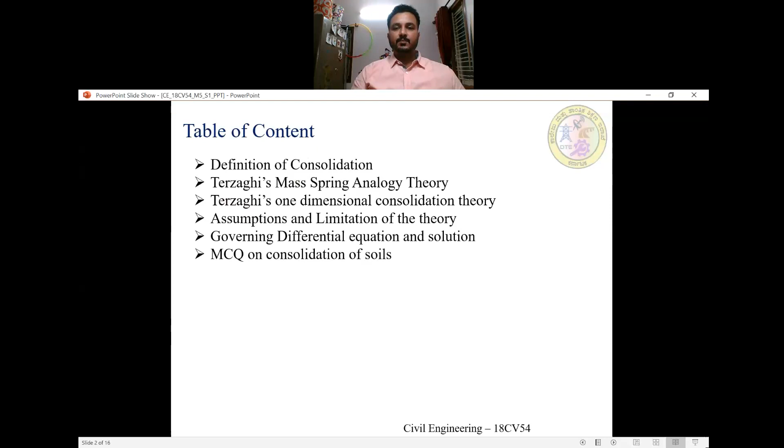Today's session we will be discussing the definition of consolidation, Terzaghi's mass spring analogy, Terzaghi's one-dimensional theory. We will also be discussing the assumptions and limitations of the theory, the basic governing differential equations, and the solutions of the one-dimensional theory. Finally, we will be discussing some important multiple choice questions relating to today's topic.

Coming to definition of consolidation. As you know, the soil is composed of many particles, solid particles, and it also consists of void spaces. These void spaces are generally filled with either air or water. Here, compressibility of soil occurs mainly due to the expulsion of the pore water from the voids. This process is called consolidation. It is a time dependent phenomenon.

Unlike compaction, which is a sudden process, consolidation occurs over a period of time and volume reduction happens due to the expulsion of water from the soil. Here, particularly, we are discussing saturated soil. Volume reduction mainly occurs on account of the load acting on the soil. The load may be due to the structure or any other temporary or permanent structure which is present over the soil.

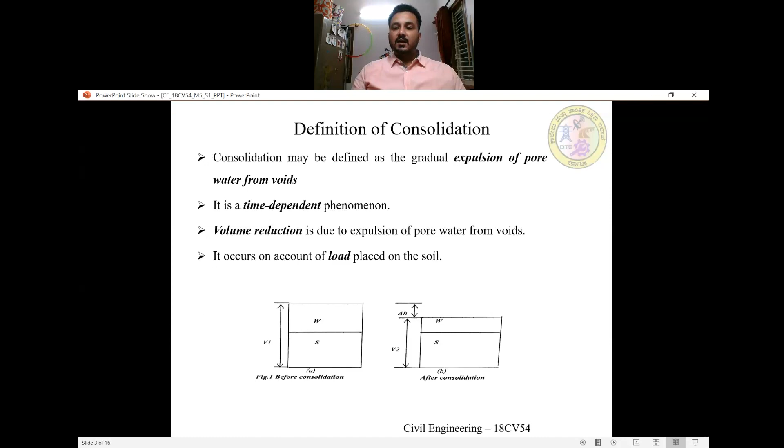Over a period of time, compressibility of soil takes place, thereby a change in volume occurs. The change in volume is represented by delta H, and the final volume turns out to be V2. This occurs due to the load acting on the soil, and this clearly represents how the consolidation process takes place. Moving further, we will be discussing Terzaghi's spring analogy theory.

In spring analogy theory, Terzaghi considered a container which is completely filled with water, and there is a valve provided which is initially closed, and in this container there is a spring provided, and the container is completely filled with water.

As you can see, when a load is applied onto the top of the piston, while the hole is still unopened, at this stage only the water resists the applied load. What I mean to say is there is a development of what is called excess pore water pressure. The load acting on the container from the piston is completely taken by the water.

As soon as the hole is opened, gradually water starts to drain out through the hole, and the load gets transferred to the spring. This can be explained as a process of drainage of this excess pore water. After some time, there will be no drainage of water, and the load will be completely taken over by the spring alone. This is on account of the full dissipation of excess pore water pressure, which terminates the process of consolidation.

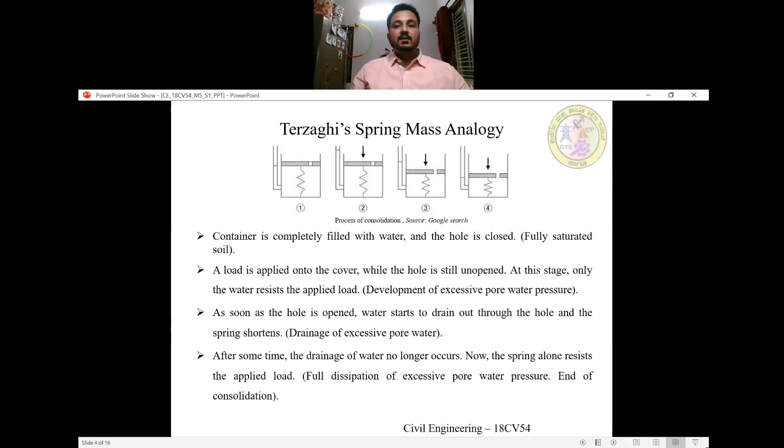So, how the load transfer takes place in the spring analogy theory can be explained with the help of this figure on the top, which shows a container with a piston over the top, and the piston is provided with a tube opening controlled by a valve. Initially, if you observe figure A, Pw plus Ps is equal to P, where P represents the load, Pw the load carried by the water, and Ps the load carried by the spring.

Initially the load will be taken by the water at time t equal to 0. Therefore, the load carried by the spring Ps will be equal to 0, and the load carried by the water will be equal to 1, since Pw plus Ps is equal to 1 if you consider 1 kilonewton of force acting upon the piston.

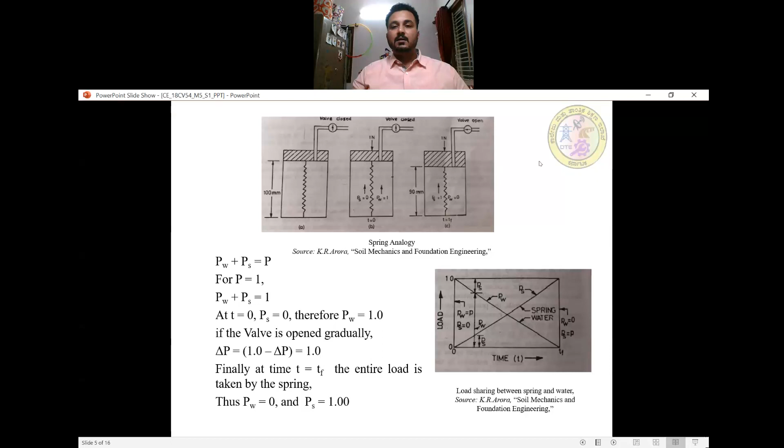Next, we'll be discussing Terzaghi's one-dimensional consolidation theory. This is a very important theory proposed by Terzaghi, and the assumptions of this theory are like this. Terzaghi assumed the soil to be homogeneous and fully saturated. He also assumed the soil particles and water are incompressible. That means they cannot be compressed.

Darcy's law for the velocity of flow through the soil is perfectly valid. Coefficient of permeability K is constant during the process. It means that the water flows freely, and the coefficient of permeability will be taken to be constant. Soil is laterally confined so that the compression is one dimensional. This is a very important assumption because Terzaghi assumes the compression to take place in one direction. It is not assumed to take place in two dimensions. It is a one-dimensional compression. That is one of the important assumptions.

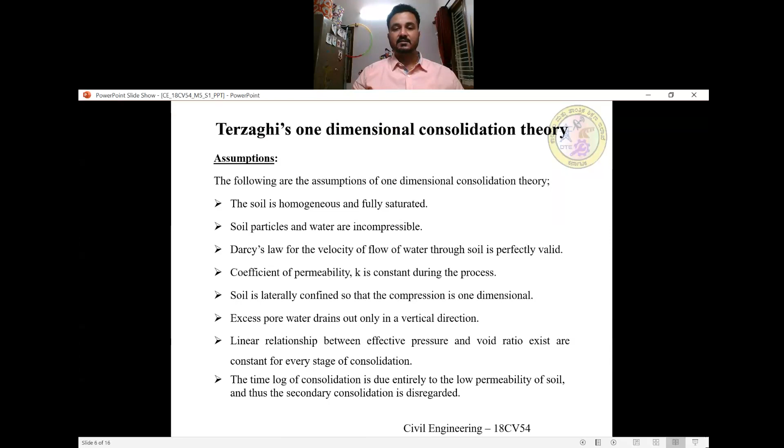Coming to this theory, if you observe the figure, there is a section of clay layer chosen, and the top and the bottom of this layer consist of sand particles. As explained in the spring analogy model, initially the whole of the pressure is taken up by the water, and the excess pore water pressure develops.

In this figure, you can clearly see the hydrostatic pressure diagram on the right hand side. It is assumed that various points along the thickness of the clay layer are connected by flexible tubes, and at time t equal to 0, just after the application of the load, the excess hydrostatic pressure is equal to delta sigma by gamma w throughout the clay layer. This is represented by the horizontal line. So the excess hydrostatic pressure is independent of the position of the water table. For example, the water table is assumed at the level of the surface of the clay layer.

So at the instant of loading, that is at time t equal to 0, the excess pore water pressure will increase uniformly by ui over the thickness h of the layer. Please observe the figure shown at the top. The layer is divided into two parts, h by 2 and h by 2, where h represents the thickness of the overall layer.

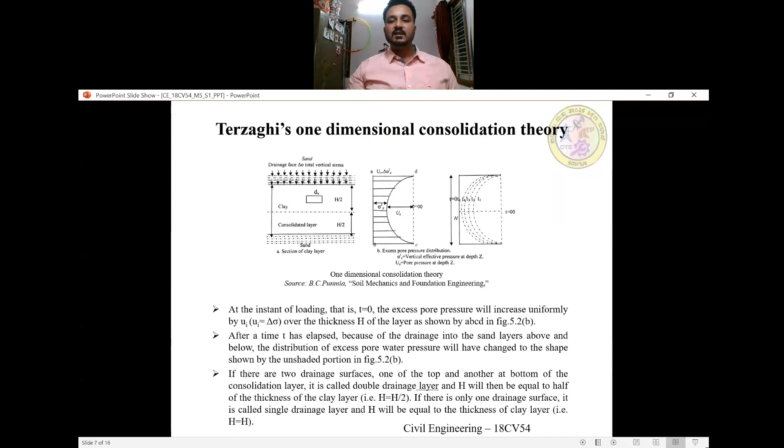Finally, when we solve this equation, we arrive at Terzaghi's one-dimensional consolidation equation, shown in the slide. This clearly explains the variation of pressure with respect to time and depth. This is the basic differential equation of one-dimensional consolidation. It gives the distribution of hydrostatic excess pressure, U bar, with respect to the depth z and the time t.

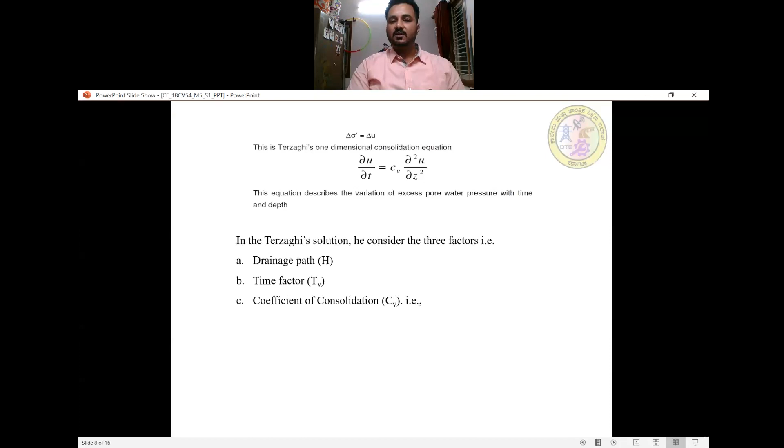In the Terzaghi solution, there are three important factors which he discusses. One is the drainage path, that is capital H. Another is the time factor, TV, and most importantly, he discusses the coefficient of consolidation, that is represented as CV.

Here, the time factor TV is given by the equation TV is equal to CV into t divided by capital H square, where TV represents the time factor. Small t is time in seconds. Capital H represents the thickness of the permeable layer. Okay, and CV, that is the coefficient of consolidation, can be obtained by the equation

CV is equal to K divided by MV into gamma W, where MV represents the coefficient of volume change and can be represented in centimeter square per gram or meter square per kilonewton. CV can also be written in the form CV is equal to K into 1 plus E divided by AV into gamma W.

This equation represents the coefficient of consolidation in terms of coefficient of permeability and void ratio. So here K represents the coefficient of permeability, E represents the void ratio, and AV represents the coefficient of compressibility.

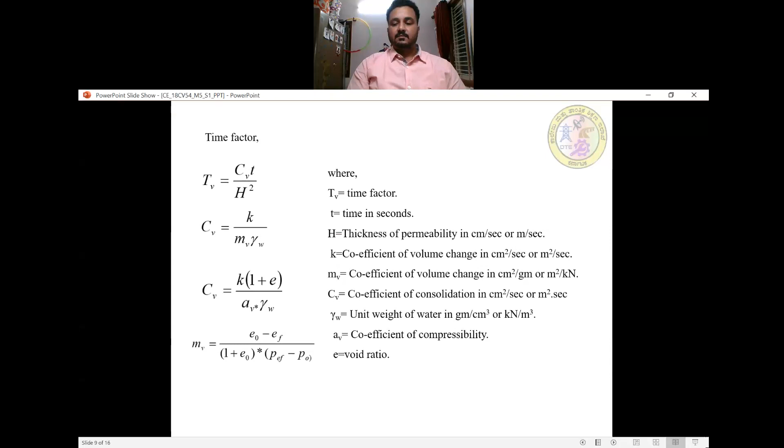Another important limitation in this theory is that the flow is assumed to be one-dimensional, but in reality, as I told you, the flow is three-dimensional. So this is one of the important limitations.

The application of external load is assumed to produce excess pore water pressure over the entire soil layer, but in some cases the excess pore water pressure does not develop over the clay stratum. This is particularly due to the application of the external load, how the load acts on the soil stratum. The load distribution will not be uniform.

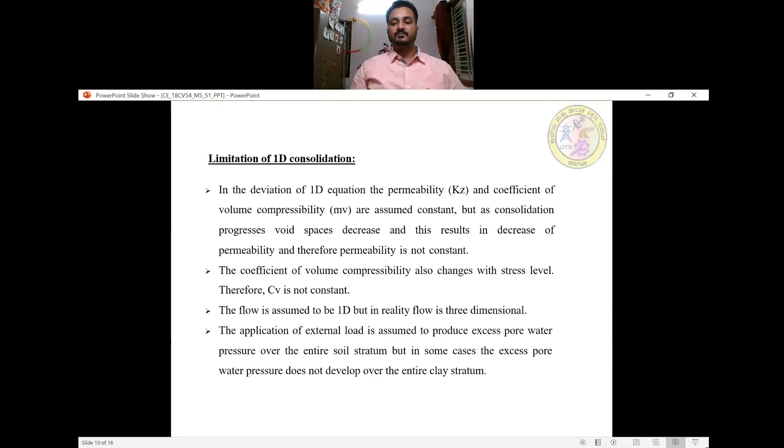So coming to the final part of the presentation, here I'm discussing some of the important multiple choice questions. The consolidation of soil involves: settlement of soil, gradual drainage and compression, compression of air in the pore spaces present in the voids, or none of the above. The answer is gradual drainage and compression of water through the voids.

Second important question, the rate of consolidation. Does it increase with a decrease in temperature, or does it increase with increase in temperature? Is it dependent of temperature, or is it unaffected by the permeability of the soil? The answer to this question is B. The rate of consolidation increases with increase in temperature.

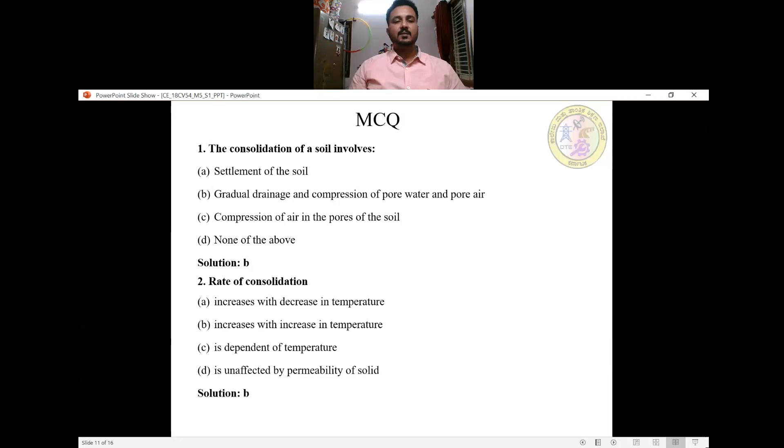The unit of the coefficient of consolidation: centimeter square per gram, centimeter square per second, gram per centimeter square per second, gram centimeter per second. The answer is centimeter square per second. The coefficient of volume compressibility in soil: is it proportional to the void ratio, decreases with increase in the void ratio, is inversely proportional to the void ratio, or is inversely proportional to the square of the void ratio? The answer is B. It decreases with increase in the void ratio.

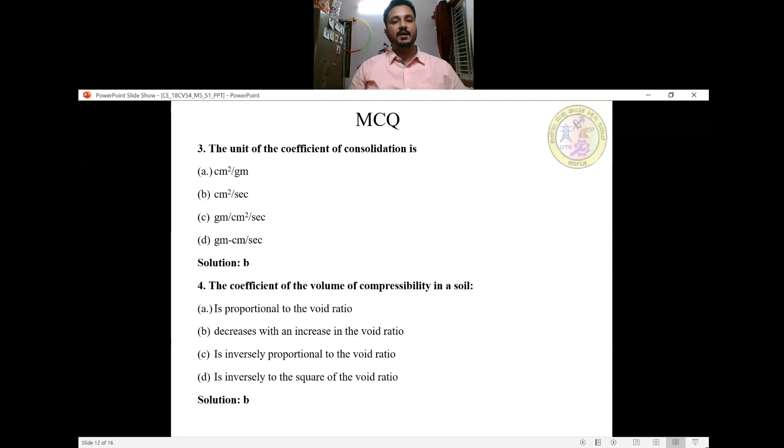The compression index of soil: decreases with increase in liquid limit, decreases with plastic limit, increases with increase in liquid limit, or is it totally unrelated to the plastic limit? The answer is increases with increase in liquid limit. The compression index increases with increase in liquid limit.

Next question is, the ultimate settlement of soil is directly proportional to the depth of soil strata, inversely proportional to the depth of the compressible soil strata, directly proportional to the depth of the compressible soil strata, or unrelated to the depth of the soil. The solution is C. The ultimate settlement of soil is directly proportional to the depth of the compressible soil strata.

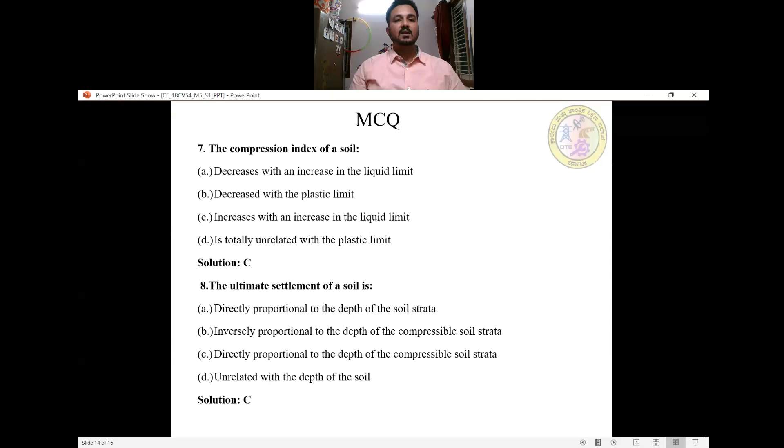Coming to the last question. Within the consolidation process, is there a gradual increase in neutral pressure, a gradual decrease in neutral pressure, a decrease in both neutral pressure and effective pressure, or do both neutral pressure and effective pressure increase? The solution to this question is B. There is a gradual decrease in the neutral pressure.